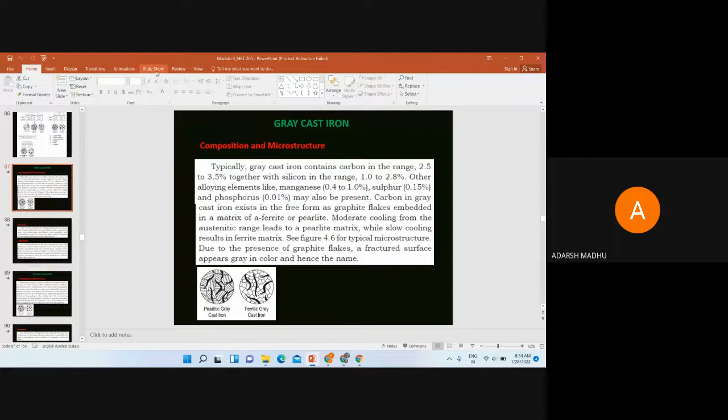Right. So last class, here we discussed the properties of cast iron and the formation of different types of cast iron, like white cast iron, grey cast iron, ductile cast iron, malleable cast iron.

We have studied the figure. And we have studied the formation of grey cast iron. Grey cast iron is formed with graphite flakes embedded in an alpha ferrite matrix or a pearlite matrix. If it is an alpha ferrite matrix, when we get the

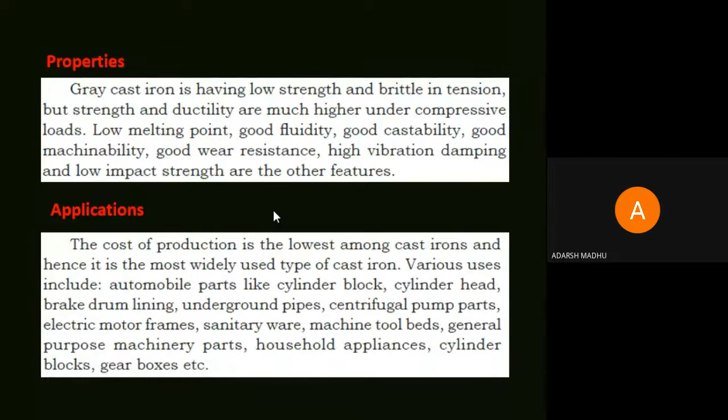We will get two types of grey cast iron. We studied the properties of grey cast iron yesterday and the applications also. Today we are dealing with ductile cast iron. Ductile cast iron can be explained the same way as we explained grey cast iron. Here we get the ductile cast iron with graphite in the form of nodules or spheroids.

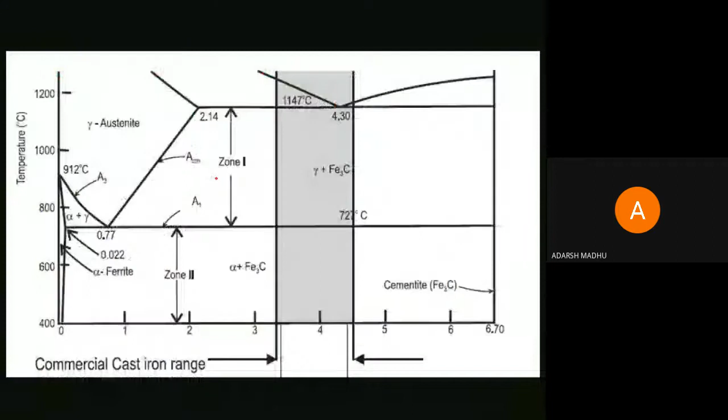So ductile cast iron can also be classified into two, as you can understand from the figure. When we are moderately cooling here, we will get ductile cast iron as graphite spheroids with a pearlite matrix.

Depending upon the cooling rate, we will get two types of ductile cast iron. First, when we are slowly cooling, we will get an alpha ferritic matrix, and if moderately cooling, we will get a pearlitic matrix. So two figures are shown here.

The typical composition of the commercially used ductile cast irons is shown here. It is 3 to 4.3% carbon, 1 to 3.5% silicon, 0.3 to 0.8% manganese, 0.03% sulfur, and 0.08% phosphorus.

So these elements are included in our ductile cast iron. Don't think that only carbon and magnesium are present. Many elements are added in all types of cast iron, but in very small quantities. So here carbon, silicon, manganese, sulfur, and phosphorus are present in a common type of ductile cast iron.

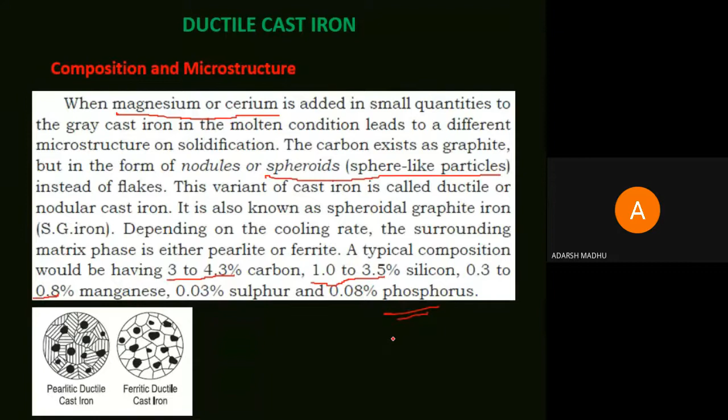Carbon is present in a large amount, 3 to 4.3%, but all other elements are at very low percentages, less than 1%. So these are the composition and microstructure of ductile cast iron. It comes in two forms according to cooling rate. When moderately cooling, we get pearlitic ductile cast iron. When slowly cooling, we get alpha ferritic cast iron.

So what are the properties and applications of this ductile cast iron? Ductile cast iron is much stronger compared to grey iron.

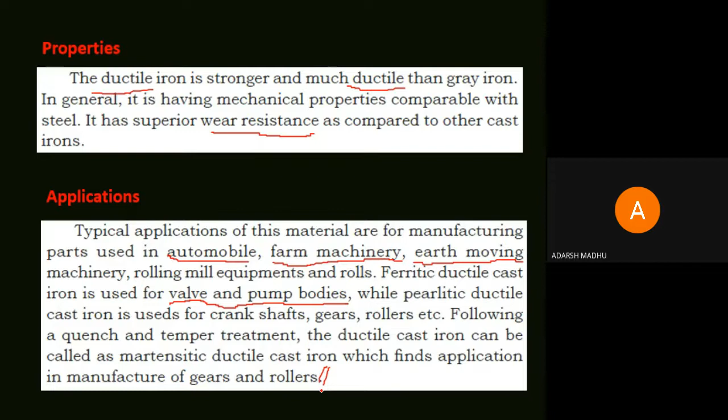So it has applications in manufacturing gears and rollers. So mainly these ductile cast irons are used for machinery equipment manufacture, automobile parts, machinery, earth moving industries, earth moving machinery, agricultural machinery, all. Right.

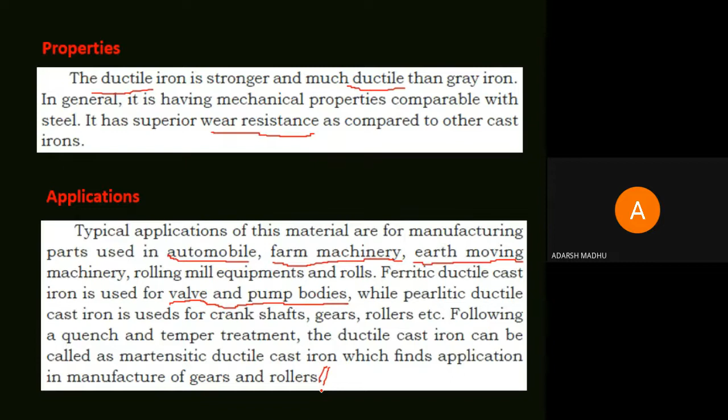Another type of cast iron is white cast iron. White cast iron has only one type.

There is no pearlitic and there is no alpha ferrite, nothing different. So white cast iron contains a lower silicon content, and we get this cast iron on rapid cooling. Remember that figure. When the cooling rate is very much higher, we get a type of cast iron called white cast iron, right?

The microstructure is one in which most of the carbon exists as cementite, Fe3C. It is not in the form of graphite, which means it is not present in a free form. It is present in a combined form called Fe3C, cementite.

Okay, so the surface of this type of cast iron alloy has a white appearance, and thus it is called white cast iron. For gray cast iron, the material color is somewhat gray. So here the surface of this type of alloy can be seen as a white color, so it is named white cast iron.

So the composition of typical white cast iron is given here. It is 2 to 3.5% carbon, 0.5 to 1.3% silicon. So all these cast irons have the same elements: manganese, silicon, sulfur, phosphorus. Very much lower percentage, below 1%, we can see in every cast iron. Manganese, sulfur, and phosphorus are there in every type of cast iron.

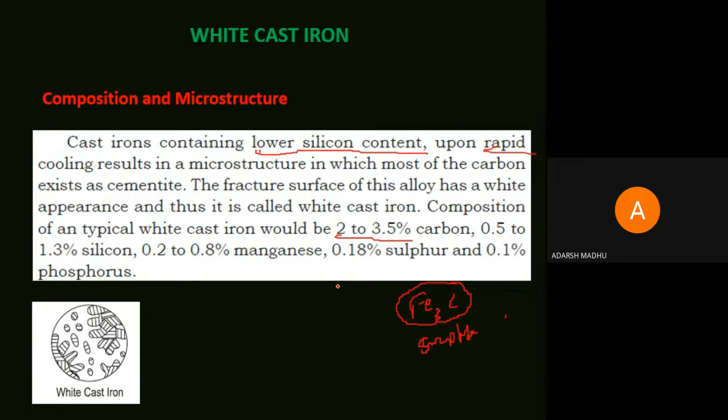White cast iron can be formed by fast cooling, right? With fast cooling we will get it. So here carbon is not occupied as in the others; here carbon can be seen as graphite flakes, here as graphite spheroids, and in malleable cast iron we can see graphite rosettes. So these are all a free form of carbon, right?

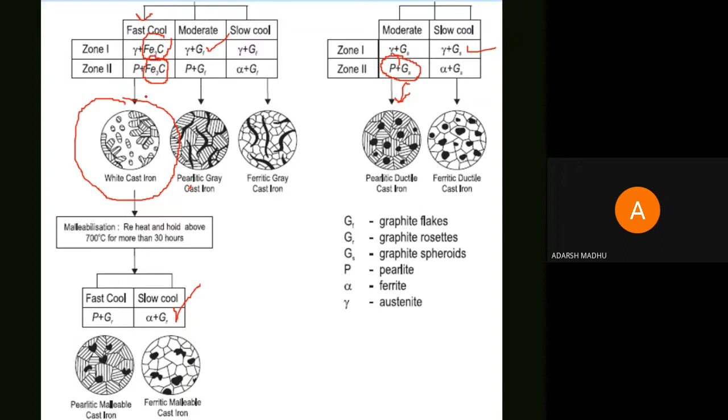So other than that, we get carbon as a compound, that is, here we can see gamma plus Fe3C and pearlite plus Fe3C. Here carbon can be seen as a compound, in the form of cementite, Fe3C. And by using fast cooling or rapid cooling, we will get a cast iron that is white in nature. It is called white cast iron.

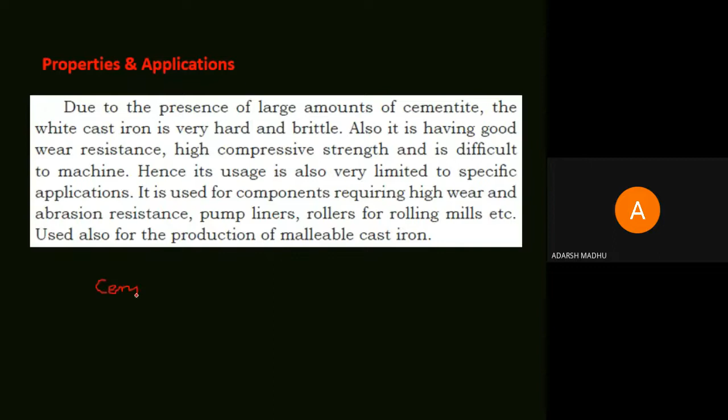And what are the properties and applications of white cast iron? Due to the presence of a large amount of cementite, Fe3C, the white cast iron is very hard and brittle. Also, it has good wear resistance. All types of cast irons have a very good property of wear resistance.

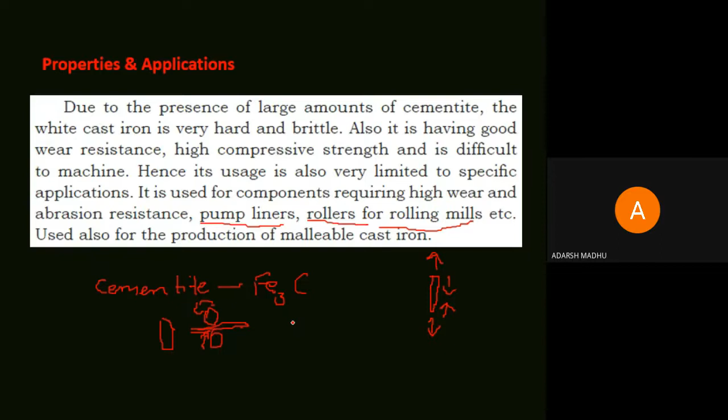Okay, this is the properties and application of white cast iron. And next is malleable cast iron. Malleable cast iron പഠിച്ചിട്ടുണ്ട്. Remember this figure. When we get white cast iron, that is the white cast iron that we obtain from using a high rate of cooling or rapid cooling, and this white cast iron, when we are

Malleabilization means reheating the white cast iron to a temperature range of 700 degrees Celsius. Reheating the white cast iron to a temperature of 700 degrees Celsius or more, and holding it for 30 hours.

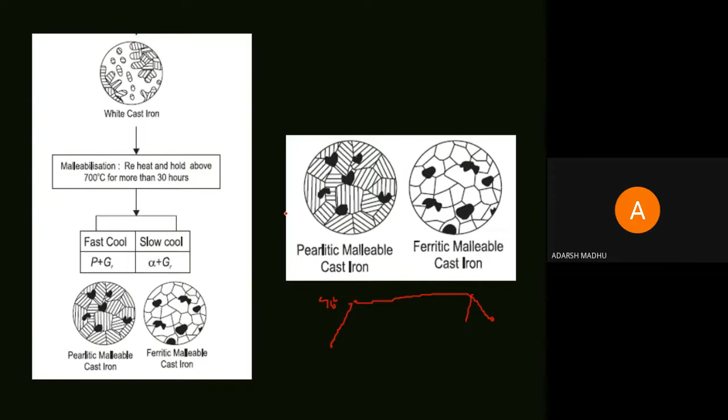When we are slowly cooling, we will get alpha ferritic malleable cast iron, and when we are very fastly cooling, we will get pearlitic malleable cast iron. It is shown in the figure. Reheating and holding above 700 degrees Celsius for 30 hours. Thereafter, when we are slowly cooling, we will get alpha plus Gr. Here we can see the carbon is present as graphite rosette

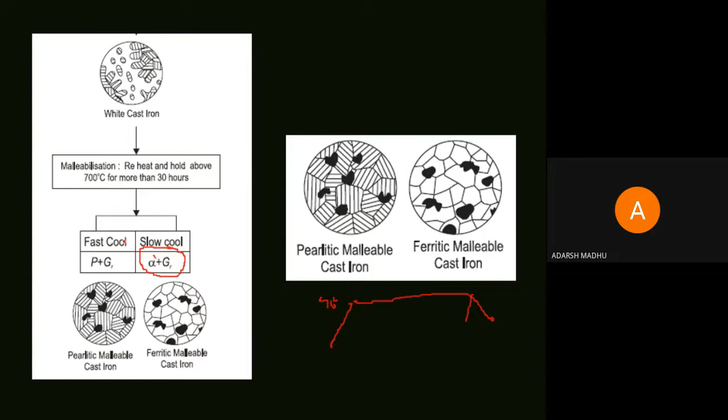Pearlitic plus Gr and alpha ferritic plus Gr. Slowly cooling and fastly cooling. Earlier, in both cases, we get the pearlitic cast iron by moderate cooling, but here the pearlitic malleable cast iron is by fast cooling. So after malleabilization, we are getting malleable cast iron. Malleable cast iron is produced from white cast iron after a heat treatment called malleabilization.

By doing the malleabilizing heat treatment on white cast iron, we get this type of cast iron called malleable cast iron. The white cast iron is heated above 700 degrees Celsius, held at the temperature for a longer period and then cooled. During the process we get graphite as irregular shaped globules or rosettes. So, Gr.

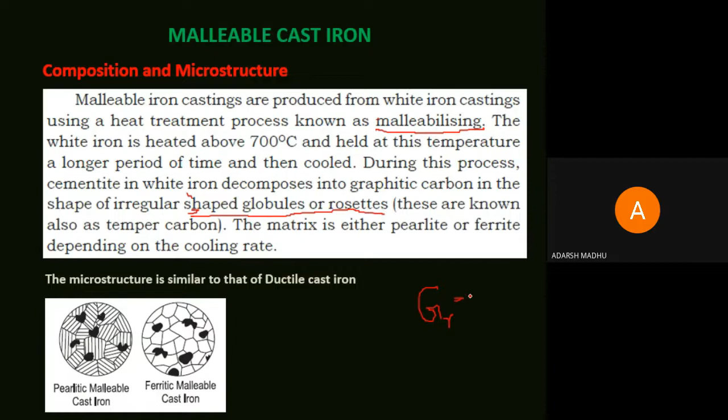Gr. Rosette. The carbon is obtained in the form of irregular shaped rosettes. So when we are slowly cooling, we are getting ferritic malleable cast iron, that is alpha plus Gr. And when we are fastly cooling, we are getting pearlitic malleable cast iron, that is P plus Gr. Okay.

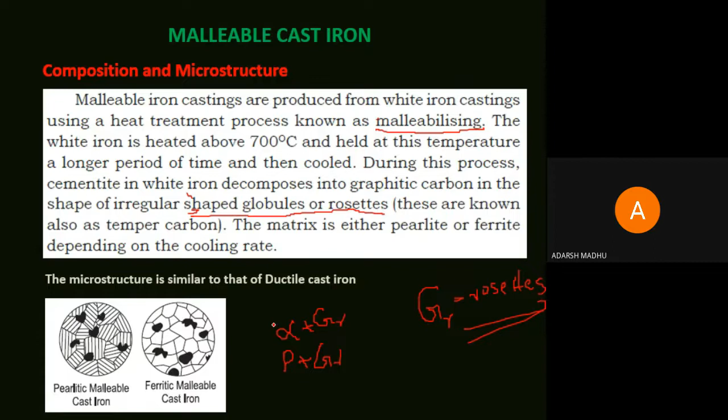The properties and applications of this type of malleable cast iron. Malleable cast iron possesses a good combination of physical and mechanical engineering properties.

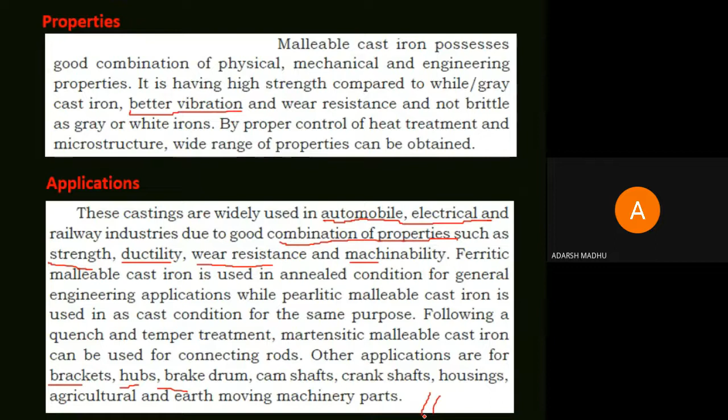Next classification of cast iron is wrought iron. Wrought iron is an iron alloy. It has a very low carbon content. So comparing it with other types of cast irons, wrought iron has a feature that it has a very low carbon content compared with all other cast irons.

It has a very low carbon content in comparison to steel and is impregnated with tiny fibrous inclusions of iron silicate slag. So it has a very small percentage of carbon, but it is impregnated, which means the iron alloy is mixed with tiny fibrous inclusions of iron silicate.

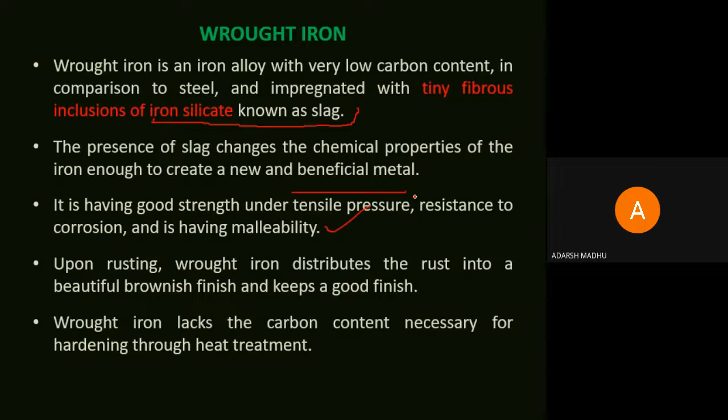And alloy cast irons, the last type of cast iron, is alloy cast irons. So what are alloy cast irons? Alloy cast irons are the cast irons which have other types of metal elements in a huge proportion as compared with carbon.

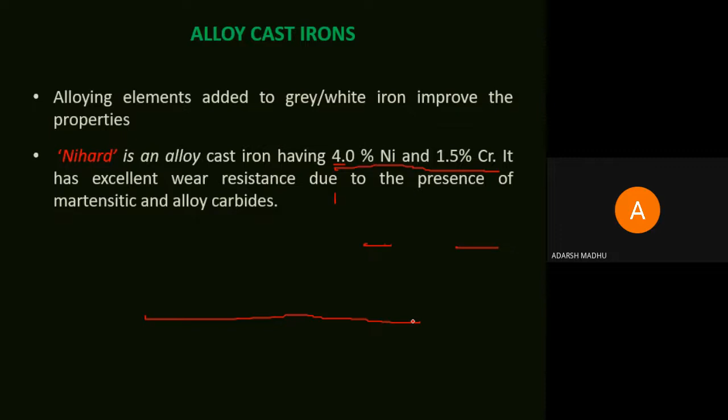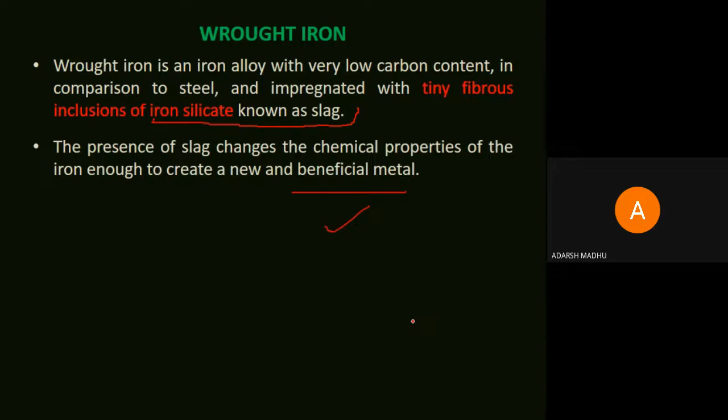So these are the types of cast irons. We have discussed about all the types of alloy cast irons - malleable, white, ductile cast irons, white cast iron, gray cast iron, malleable, etc. We have discussed 6 types of cast irons, so we can conclude the topic of cast irons here.

So next hour we can discuss the types of non-ferrous alloys. We had already discussed ferrous alloys, that is ferrous type materials - cast irons, steel, etc. Ferrous materials are those including steel and iron, classified under ferrous materials, and non-ferrous materials are those which have no steel or iron content. The metal which is not prepared using iron and steel is classified under non-ferrous material. So in the next hour, the fifth hour, we will discuss the different types of non-ferrous materials, and we can conclude this fourth module today.